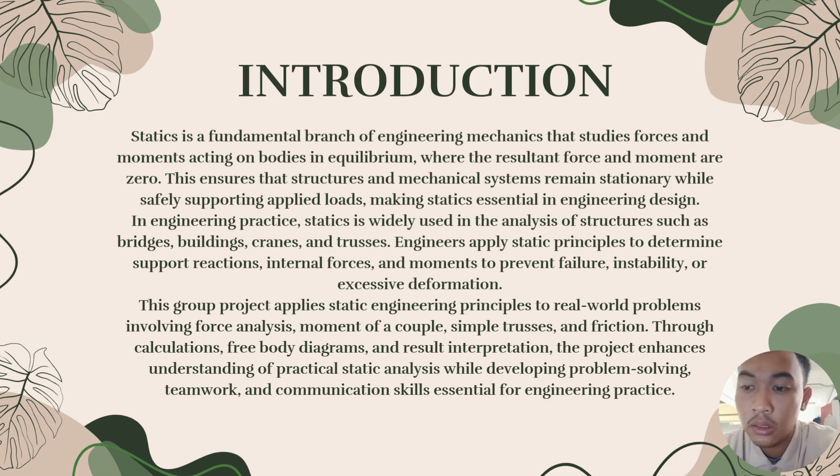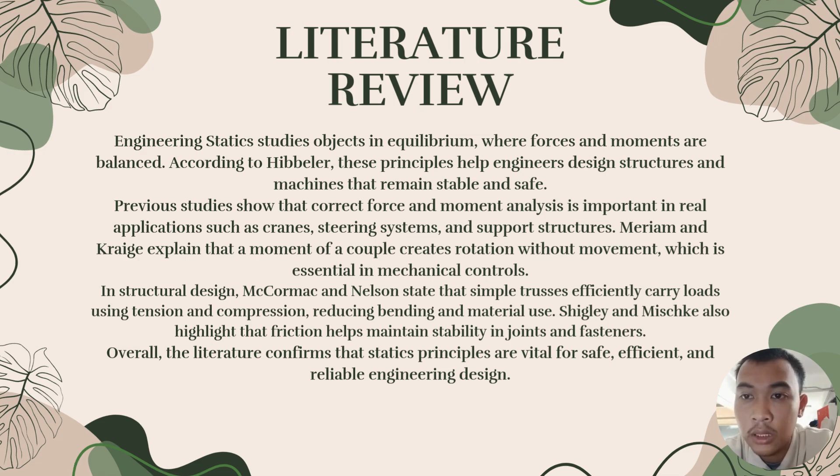Based on the literature review, engineering statics is a fundamental area of engineering mechanics that focuses on analyzing systems in equilibrium when both the resultant force and moment are zero. According to Hibbeler, static principles such as free body diagrams and equilibrium equations are essential to ensure the stability and safety of engineering structures.

Previous research explained force and moment analysis in real-world applications such as cranes, steering systems, and load supporting structures. Meriam and Kraige highlight that the moment of a couple produces rotation without translation, which is important in mechanical control systems. In structural applications, McCormac and Nelson state that simple trusses efficiently distribute load through tension and compression, reducing material use and structural failure.

Overall, the literature supports the importance of static engineering principles in achieving safe, efficient, and reliable engineering design, which directly supports the objective of the project.

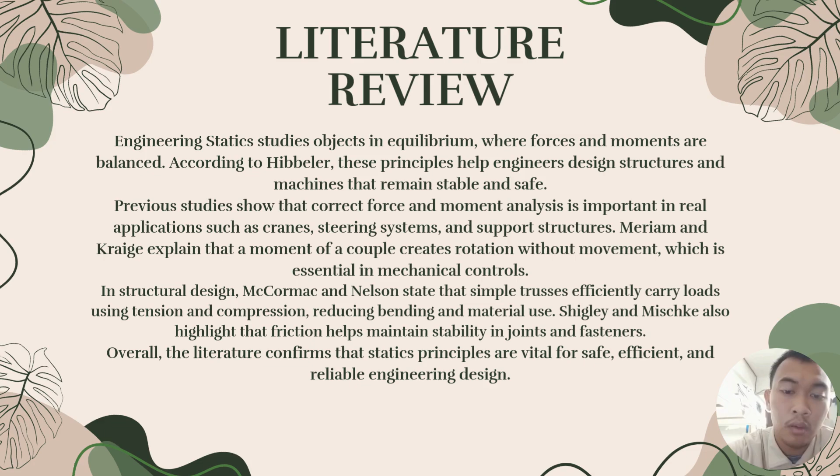250252, and I will present about problems faced in the real world. So, the first is friction. The real world problem is screws holding objects together. Why? Because friction keeps the screw tight between materials. For example, a screw fastening two pieces. The engineering theory for friction is friction in screws, the relationship between axial force and applied torque.

Second is balancing a seesaw. The real world problem is placing the fulcrum to balance people of different weight. For example, a seesaw used by two people, center of gravity and fulcrum. The theory is center of gravity, the point where the total weight of an object acts. Third is force. The real world problem is force on a crane. Engineers must account for load weight, crane weight, wind force, and boom angle. For example, a crane lifting a load. The engineering theory is statics: use equilibrium principles to keep the crane stable and prevent tipping.

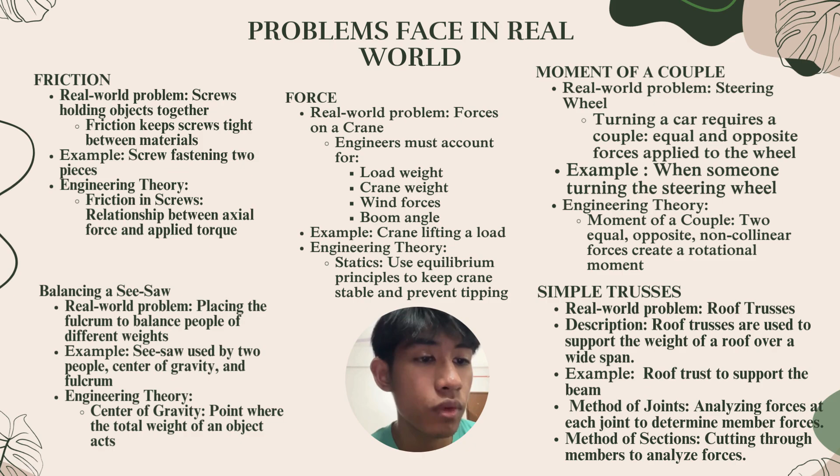Today, I will present to you our first choice of real world problem, that is force. As you can see from this question, we are given a car that weighs around 3,500 pounds being carried onto a ship using two ropes on a crane. From this question, they intend us to find the tension in every rope.

As you can see, this is the solution I propose. That is using equilibrium style of calculation. First, we find our Fx and Fy. Then we create an equation to eliminate the unknowns. As you can see here, I get our T is equal to 15275.8 Newton. Then after we get our unknown, we move to step 4, that is to eliminate the remaining unknown.

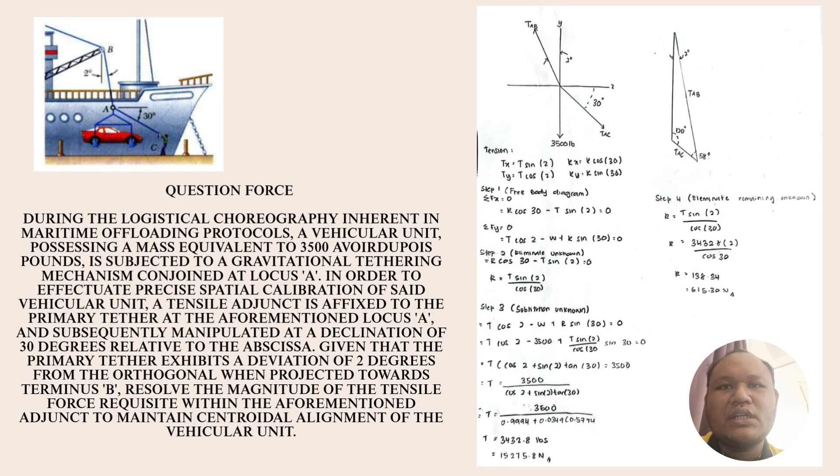As you can see, I use R equal to T sine 2 per cos 30. We have our T as a solution, so we can get our R, that is 615.30 Newton.

Now for the discussion and result. Cable and tension. The cable carries a large tension of 15275.8 Newton, showing that it mainly supports the weight of the vehicle, the weight of the 3,500 pound automobile. The tension is slightly lower than the vehicle weight because a small part of the load is supported by the vertical component of the rope.

Next is the rope tension. The rope tension is much smaller at 615.30 Newton. This is because the rope is used mainly to keep the automobile centered horizontally, not to support its weight. The 30 degrees angle allowed the rope to balance the small horizontal force from the cable.

Equilibrium condition. The system remains stable because all forces are balanced. The horizontal force of the rope balances the horizontal force of the cable, while the vertical components of both tensions support the automobile weight. And lastly, the practical implication.

A strong cable is required due to the high tension it carries. The rope must also be strong enough even though its tension is smaller. The angles of the cable and the ropes are important. Changing them will affect the tension and the system stability.

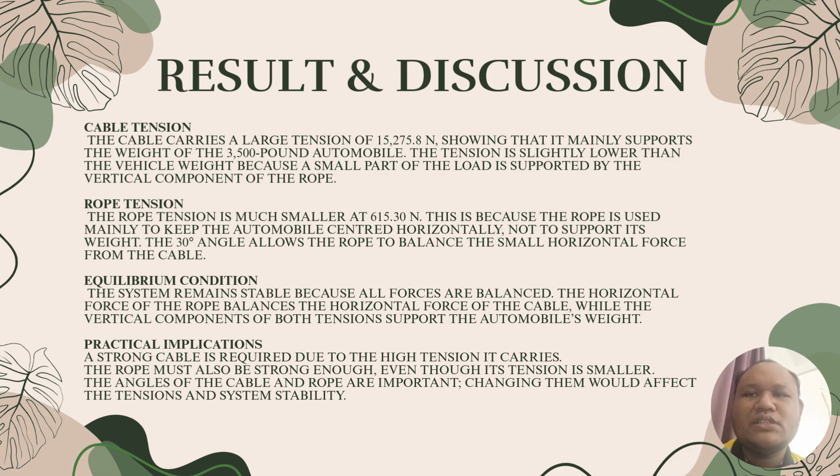My matrix number is CD250271. Next, I will present the second real world problem, which is... Our scenario involves a driver applying a pair of 25 Newton forces to a steering wheel with a diameter of 380 mm. To find the magnitude of the moment, we multiply the force by the distance, which gives us a total moment of 9.5 Newton meter.

However, because the steering column is inclined at a 20-degree angle from the vertical axis, we need a more precise vector representation. We define the position vector for points A and B using trigonometric components, specifically 0.1785 in the J direction and 0.065 in the K direction. By calculating the relative position vector between these 2 points, we get a displacement of 0.357 J and negative 0.130 K. Finally, to find the moment vector, we perform a cross product of this position and our 25 Newton force.

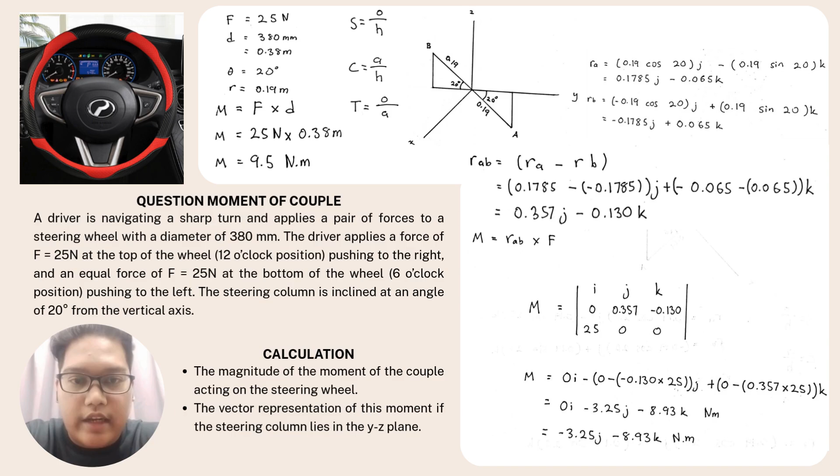This calculation reveals that the moment is not just a single number, but a vector acting into the plane, negative 3.25 J and negative 8.93 K. This breakdown is exactly what allows us to understand how the torque resolves into the dashboard and the steering column assembly.

Next, for the result and discussion, let's start with what actually happens physically when you turn the wheel. The most significant finding is that we are not just applying force, we are creating a pure couple. In engineering terms, this means the 9.5 Newton meter moment acts as a free vector.

Because it's a pure couple, the steering column feels the exact same amount of torque regardless of where your hands are on the rim, whether you prefer the 10 and 2 position or 9 and 3. As long as your hands maintain the 380mm spacing, the steering response is identical. This is a key part of driver ergonomics. It ensures the car feels predictable and consistent for every driver.

Now, how does the force actually travel into the vehicle hardware? To visualize this, we use the right hand rule. If you curl your fingers in the direction of the steering turn, your thumb points exactly where the moment vector is headed, straight down the axis of the steering column.

Our calculation gave us specifically a negative component. This is not just abstract data. It tells us the torque is pushing down and away toward the dashboard. As an engineer, you will use the specific vector data to select the right bearing. We need a bearing that can handle not just the twist of the turn, but the specific angle and thrust of the steering column.

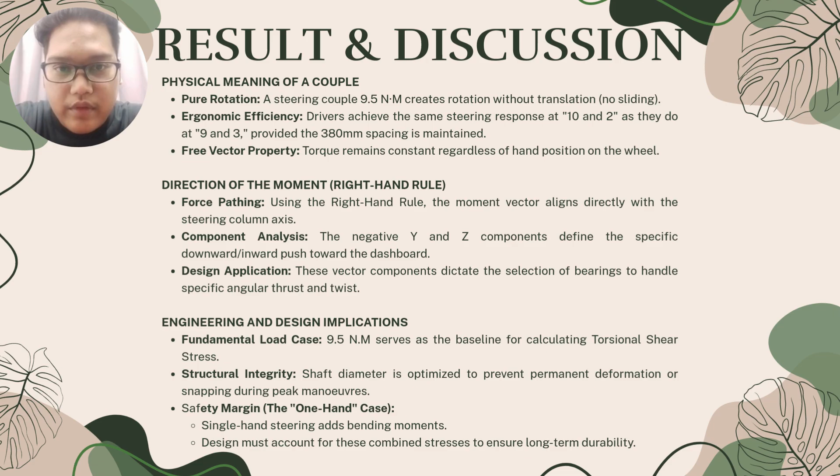However, we have to account for the real world. In our math, we assume a pure couple with two hands, but we know drivers often use just one hand. That shift changes the physics from a simple twist to a bending moment. Because of this, our final safety margin must be even higher than our perfect calculation to ensure the shaft can handle the extra side loading.

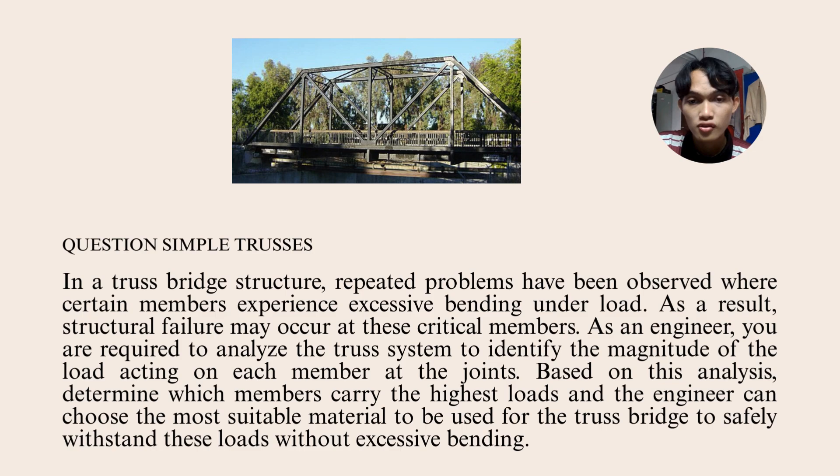Based on this analysis, determine which members carry the highest load, and the engineer can choose the most suitable material to be used for the truss bridge to safely withstand this load without excessive bending. So from this question, we need to identify the members that have the highest load, so we can help the engineer choose the suitable material. So this is the calculation of the truss.

First, we need to find the reaction force using moment equal 0. So at moment A, we can get the value of Ey equal 30 kilonewton. And if we find the moment at E, we can get the value of Ay is 30 kilonewton. And then we make a free body diagram at the right section. We can get the answer of FDC equal 30 kilonewton, FFG negative 30 kilonewton, and for FFC we get the value 42.43 kilonewton.

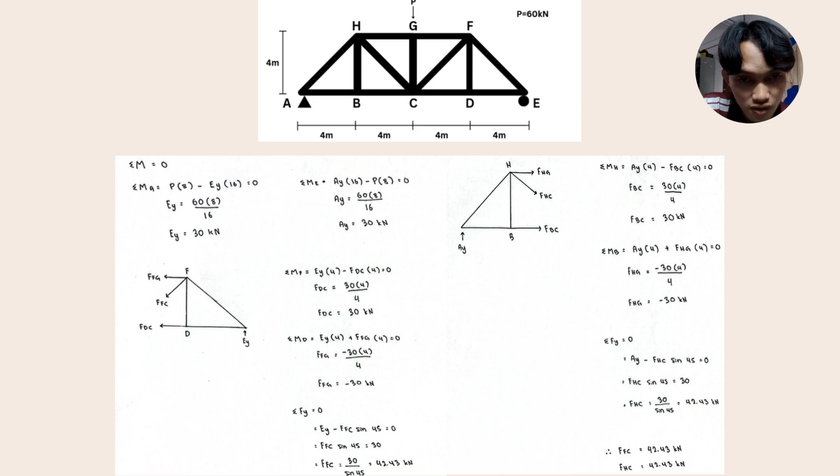And then we make the free body diagram at the left section. We can get the answer of FBC is 30 kilonewton, FHG is negative 30 kilonewton, and lastly FHC is 42.43 kilonewton. So from this we can know the highest load is at FFC and FHC. And lastly, the result and discussion.

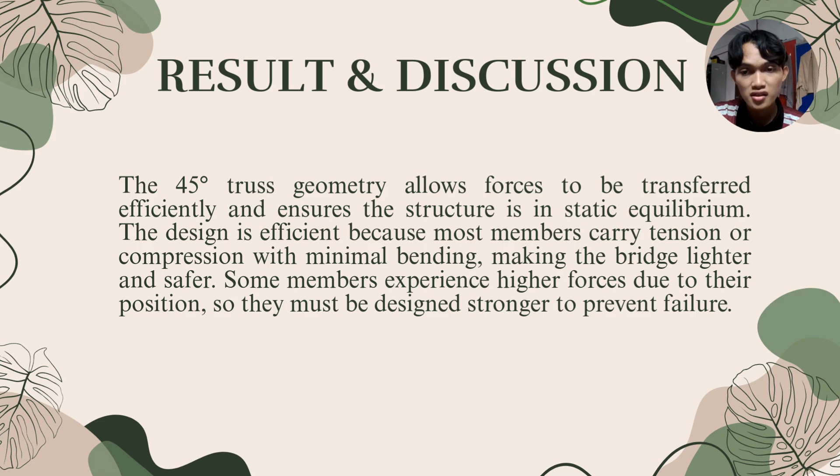The 45-degree truss geometry allows force to be transferred efficiently and ensures the structure is in static equilibrium. The design is efficient because most members carry tension or compression with minimal bending, making the bridge lighter and safer. Some members experience higher force due to their position, so they must be designed stronger to prevent failure. From the calculation, we can identify which members need to use strong material. The calculations show FFC and FHC have higher pressure, so the engineer can choose the suitable material.

Okay, in conclusion, the literature reviewed clearly shows that engineering statics is essential for understanding and analyzing systems in equilibrium. Principles such as force balance, moment of a couple, truss analysis, and friction play a crucial role in ensuring the stability, safety, and efficiency of engineering structures and mechanical systems.

The studies highlight that applying these concepts in real-world situations such as cranes, steering mechanisms, and truss structures helps engineers prevent failure, reduce material usage, and improve overall design reliability. Therefore, static engineering principles provide a strong foundation for safe and effective engineering practice, supporting the objective of this project.